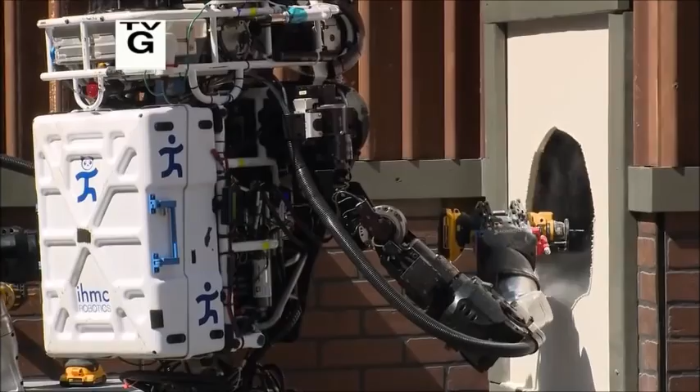It's one of the most ambitious challenges in the history of technology. Ladies and gentlemen, start your robots.

The race to build robots that can save lives in a disaster, that can even rescue us. But to do that, they'll need to climb ladders, walk over rubble, turn valves.

And no one knows if it's even possible. There's so many things that could go wrong. It's scary. When you try to instill human-like intelligence, human-like manipulation skills into machines, it's just very, very hard to do.

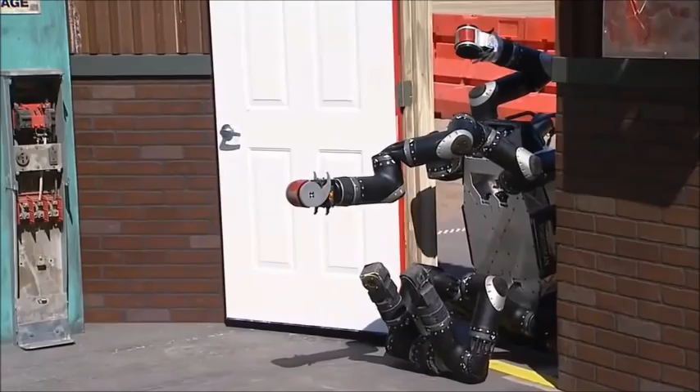What will it take for robots to have the right stuff? And are we ready for the consequences?

It's too easy to look at them and say, oh, they're not there yet. They will get to something very powerful. And then you have to say, well, where will we have gotten to? They might actually have the capacity to be smarter than us.

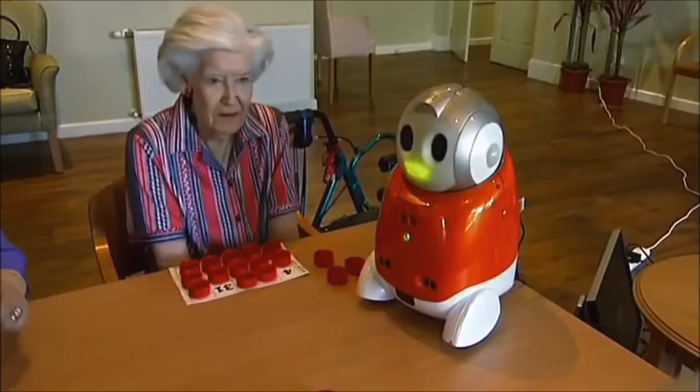What impact will robots have on our future? On how we work, how we interact, even how we see ourselves.

For decades, roboticists have wowed us with their creations. Do you have any questions?

Especially in Japan, where bots are starting to cook for us, do the laundry, even sing and dance.

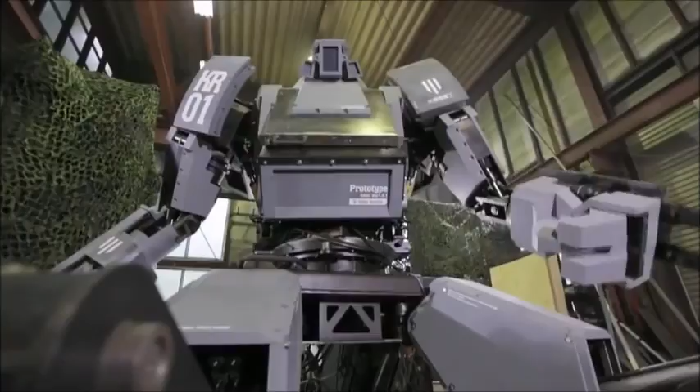Some look so human, it's hard to tell us apart. But looks can be deceiving. People see these humanoid robots developed in Japan and all these fancy things, and they had the expectation that, oh, we have these robots and they're gonna save the world. But that didn't happen.

March 2011. A devastating earthquake and tsunami rocked Japan. Explosions and fires at the Fukushima Daiichi nuclear power plant left the area dangerously radioactive. Going inside, even for a few minutes, was life-threatening.

It was the perfect time for Japan's cutting-edge robots to come to the rescue. But none did. The real tragedy was if simply some valves could have been turned, or some switches could have been flicked, or hoses attached, a lot of the meltdown could have been prevented.

The question was, when robots were needed the most, just how come they weren't effective? And so I think that led to a lot of reflection. After decades of research, where were our robot heroes?

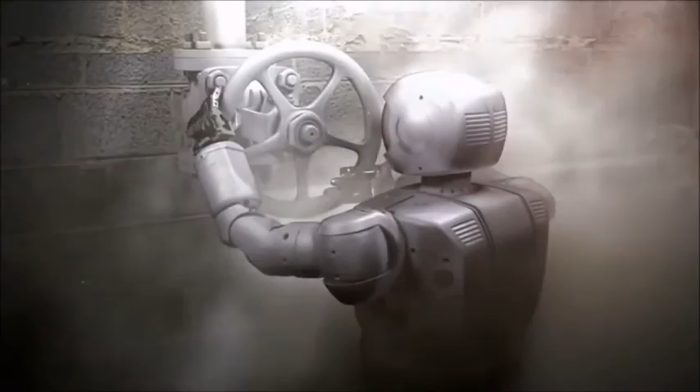For generations, science fiction has portrayed robots as our loyal servants. Welcome to Altair 4, gentlemen. I am to transport you to the residence.

But it turns out, our imagination has taken us much further than our technology. It's hard to create robots that can function in our world. One of the challenges with deploying robots in the real world is that the real world is like the Wild West. It's very rich and complex and very unforgiving.

What will it take for robots to make their way out of the lab and into the real world? We're about to find out.

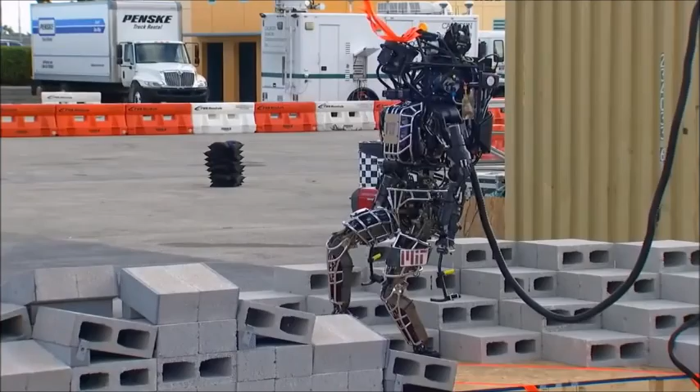Ladies and gentlemen, start your robots. At the most ambitious robotics competition in history. We welcome you to the DARPA Robotics Challenge. This is where imagination meets innovation. You have completed the course!

In 2013, at a racetrack on the outskirts of Miami, DARPA, the research arm of the U.S. Department of Defense, challenged 16 teams from around the world to build rescue robots that can help save lives in a disaster.

Very exciting, very exhausted, very nervous, and frustrated at the same time. Dealing with robots is always like that. It's the kind of challenge DARPA is known for. Cutting edge and high risk.

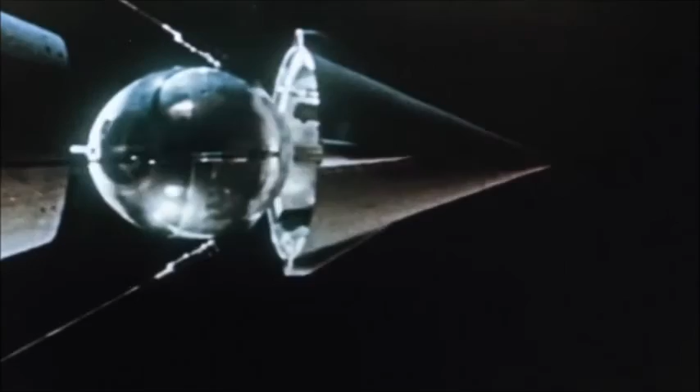DARPA was formed back in the 1950s in response to the launch of Sputnik, the world's first artificial satellite built by the Soviet Union.

Since then, the agency has spent billions developing military technology, advanced weaponry, like stealth technology, drones, and night vision. But the spin-offs from this research have gone far beyond the military. The internet, GPS, bionic arms, even Siri were all fueled with DARPA funding.

Cancel golf today. It's off your calendar. Good.

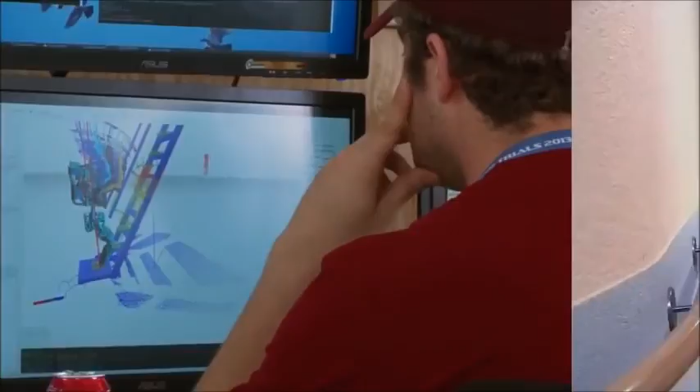If these researchers succeed in creating rescue robots, the same technology could be used to develop robots that take care of the elderly, babysit our kids, clean up after us. Robots in almost every facet of life.

But first, can robots really help out in a disaster? To find out, DARPA has set up an obstacle course for bots, with human operators controlling their every move.

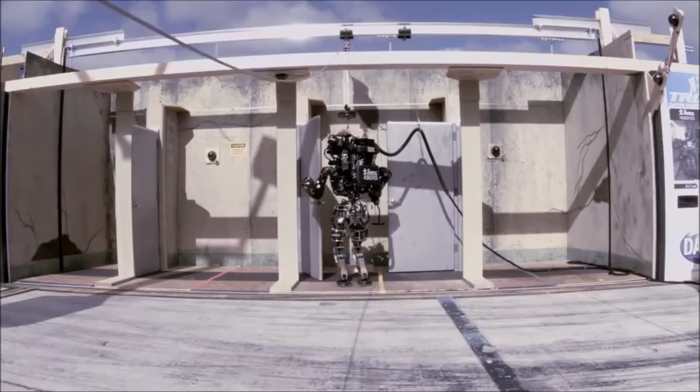Yeah, here we go. The robots must perform basic tasks like opening a door. All right, go, go, go. Turning a valve, drilling a hole in a wall, walking over rubble, even driving a car.

Bot after bot takes their first steps into the real world.

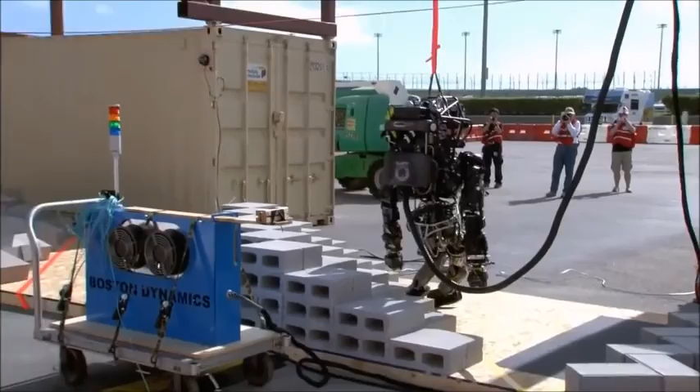And there's nothing easy about it. It's a monumental challenge. DARPA calls it DARPA hard. I almost said it was DARPA impossible.

Robots fall off ladders. Some barely move an inch. They even struggle to open doors. The things that a human can do instinctively, easily, you don't realize how hard something like walking is until you try to reproduce it in a machine.

When my baby daughter took her first step, did she walk? No, she took a step and she fell down, right? Over time, she started to walk. And it's kind of like we're seeing here. There are a lot of baby steps.

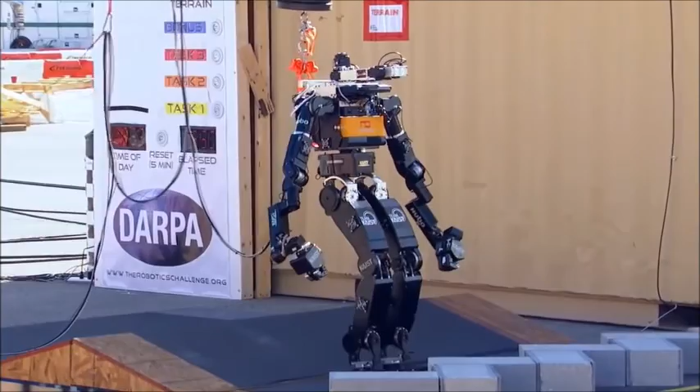After 2 days of competition, the results are not impressive. But this is just the start of DARPA's grand experiment. The agency is giving the roboticists another chance to get it right, and they're putting their money where their mouth is. The top scoring teams in this first challenge are receiving $1 million each to continue their work.

In 18 months, they'll return for the final challenge and the chance to win a grand prize of $2 million.

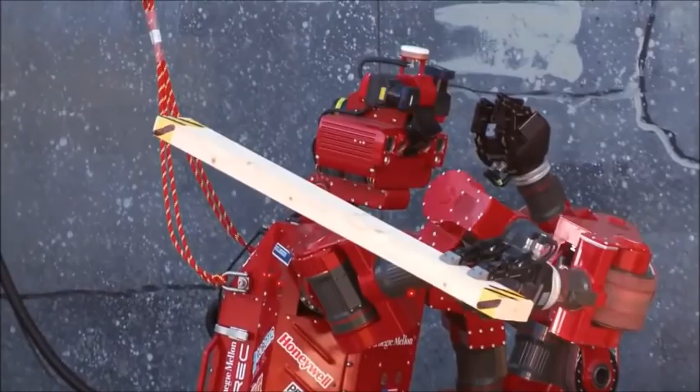It's not clear to me how well the teams are going to do. They can't be too hard because then everybody fails. Can't be too easy because then it's not worth doing at all. But if you make it just right, like Goldilocks, right? I have tried to hit the sweet spot of difficulty, but I think risking failure is the DARPA way.

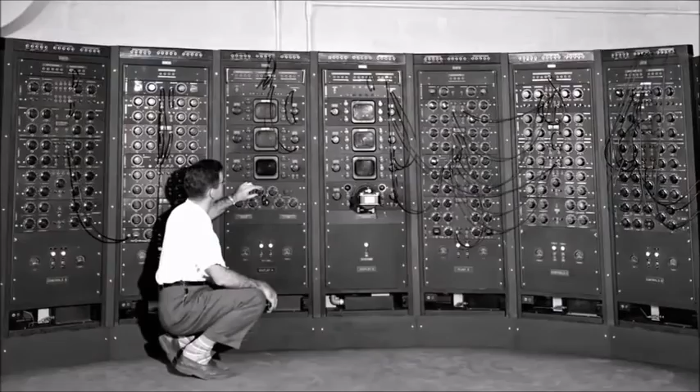Back in the early 50s, Alan Turing, one of the founders of artificial intelligence, said that the best thing we could do was build a robot with TV cameras for its eyes and motors to drive its legs and have it romp around the countryside and learn from the real world. But he decided that was technologically too hard back in the 50s, which it certainly was. So he said, let's leave that physical interaction to later, and let's work on more abstract problems, the intelligence abstract problems.

The field of artificial intelligence, or AI, has already built machines that beat us at chess, trade stocks with lightning speed, and search for anything we want in an instant. Yet, when it comes to robotics, progress has been painfully slow.

Some of the biggest problems robots face are things we humans usually take for granted, like mobility, manual dexterity, and the ability to see and understand our environment. These are the challenges the robotics teams will tackle in the DARPA competition, beginning with mobility.

What's the best way to make a machine that can move through our world? Does it need to walk on 2 feet like us? Some roboticists think the answer is yes.

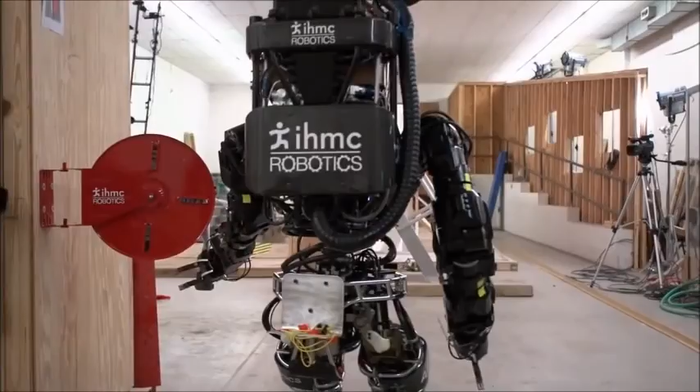In Pensacola, Florida, at the Institute for Human-Machine Cognition, or IHMC, one of the teams competing in the DARPA Robotics Challenge is hard at work developing its own software to run this massive bot named Atlas, a 330-pound powerhouse. DARPA funded the design and development of this rescue robot.

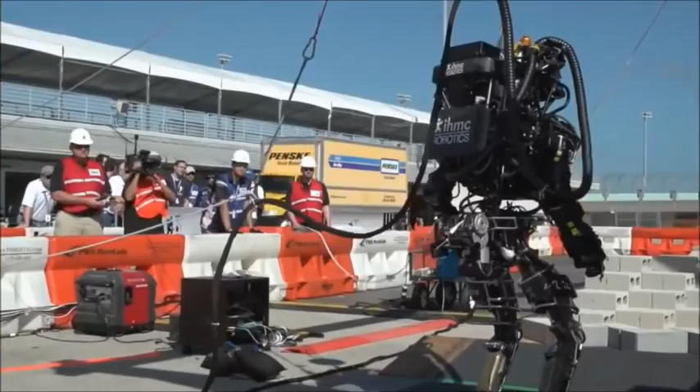Several teams competing in the challenge are using this hardware, but writing unique software to guide their robot.

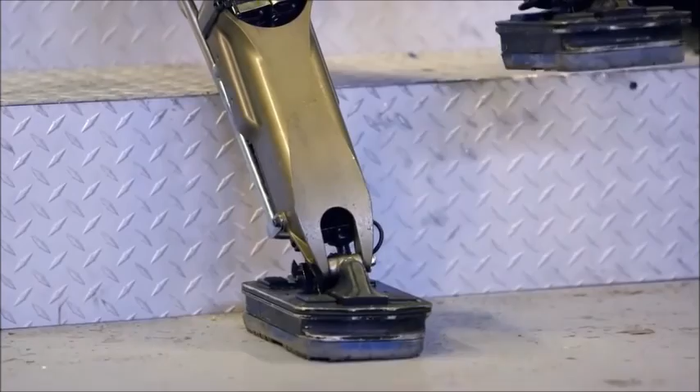You might wonder why Atlas is so top-heavy. Most of its oversized head is packed with cameras and sensors, and while its feet may look small, they're designed to fit in the kind of places we walk.

With bipedal walking robots, there's still a lot of strategies we have to determine, and there's no known textbook solution yet. It's more art than science still.

For team leader Jerry Pratt, finding the best way for a bipedal robot to walk has not been easy or quick. Well, I've been working on bipedal walking robots since 1994, so 21 years now. He started back in graduate school at the MIT Leg Lab, where some of the most bizarre-looking bots hopped, jumped, and flipped. But the robots Jerry built were different, because they walked on 2 feet.

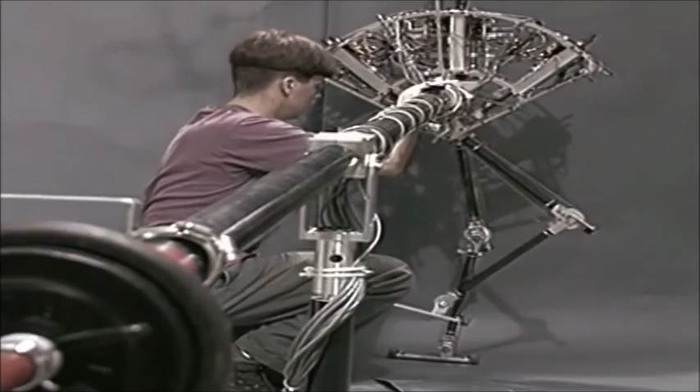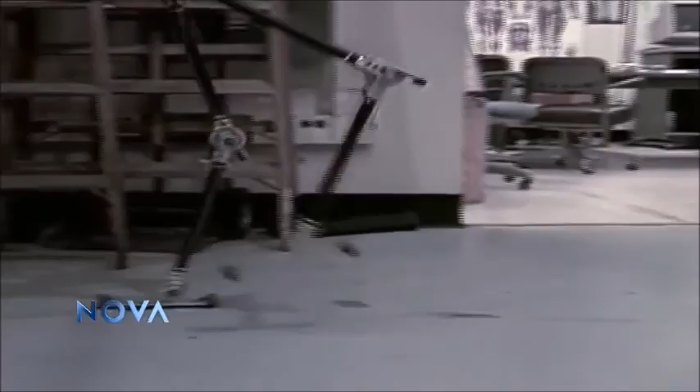Using nature as his guide, Jerry gave his bipeds hips, knees, and ankles that mimicked how animals move. This one, called Spring Flamingo, had specially designed motors that worked a lot like muscles, varying the amount of power each joint used. Its legs and feet worked a bit like shock absorbers. They had a little give.

That robot was a really good workhorse. We had it working for about 3 years, probably walked about 20 miles or so.

When it came to designing a humanoid, he focused on developing the perfect combination of hardware and software that would enable his biped to stay upright as it calculates the best way to shift its center of mass, lift its leg, swing it forward, and put its foot back down in the right place, and with just the right amount of pressure. To make these elaborate calculations, the robot needs instructions, lines of code that tell it how to move.

These lines of code are written in a programming language that resembles English. But for Atlas to use them, its onboard computer has a program that translates them into a language a machine can understand: zeros and ones. It takes more than 2 million lines of code to run Atlas, 500,000 just to put one foot in front of the other.

It's the interplay of hardware and software that keeps this bot on its feet, an ability that took hundreds of thousands of years of human evolution to perfect. We'll often look at what strategies does a human use in order to walk, because the physics in the world that a human operates in is the same as the robot.

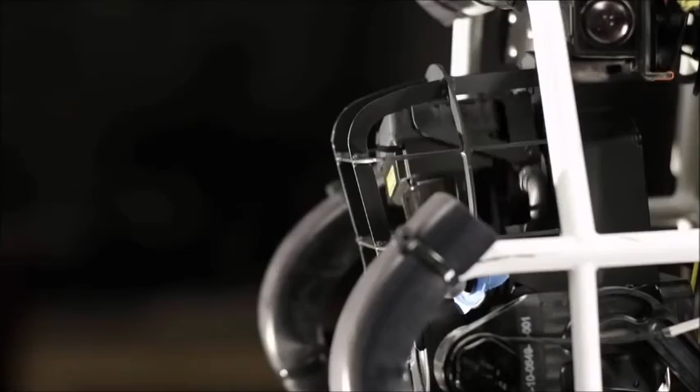What kind of senses does Atlas use to walk on 2 feet? For eyes, the bot has a stereo camera and a couple of fisheye lenses sticking out the side of its head, along with a spinning laser called LiDAR that scans everything in the world around it and creates a 3D model of its environment. Atlas doesn't have an inner ear to tell it which way is up.

Instead, it uses a small cylinder in its butt that contains gyros and accelerometers that tell it where it is and how it's moving. In addition, sensors on each joint tell Atlas where its limbs are in relation to each other. The result is an extraordinary sense of balance, allowing Atlas to stand on 1 foot like a ballerina, at least in the lab. But in the real world...

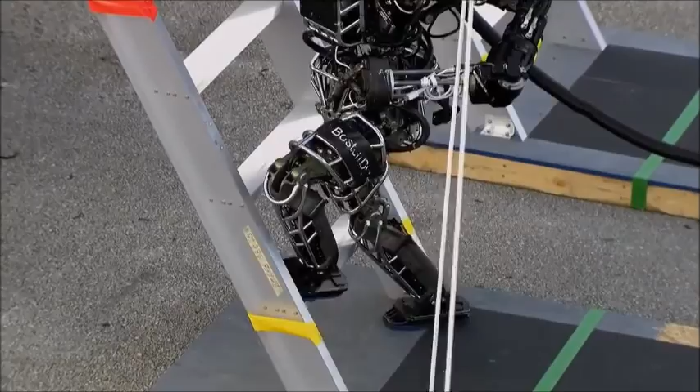Atlas's gyros and sensors aren't always enough. We only have a limited number of sensors on the robot. Whereas with a human or an animal, you have thousands of little force sensors on every square inch of your body, over 100,000 just on the soles of your feet. You can step on something and detect what it is, whereas the robots, they don't know that. They just know they stepped on something.

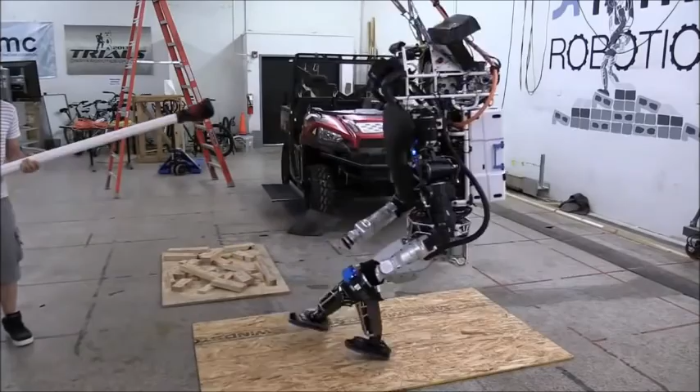At the final challenge, if Atlas should step on something the wrong way, if the hardware and software don't work perfectly, it will fall. We cannot get up from a fall currently, and we probably won't survive a fall. If we fall during the finals, that may be the end of our whole weekend.

Atlas isn't the only biped that has trouble staying upright. Meet Hubo, designed and programmed by cousins Paul Oh and Jun Ho Oh. At the first challenge, Hubo clearly wasn't ready for the big, bad world. It's with fondness, it's also with some pain that we think about it. We went into the challenge with quite a lot of enthusiasm, but when we got there, really, it was just like one thing after another.

There were a lot of these real-world instances that we did not experience in the lab. That was a real awakening.

Across the ocean, at the Korea Advanced Institute of Science and Technology, Jun Ho Oh is also doing some soul-searching. Our expectation was very high, but result was very catastrophic. So the gap was too big. It took at least a couple of months for the recovery, then I get back to my normal mental stage.

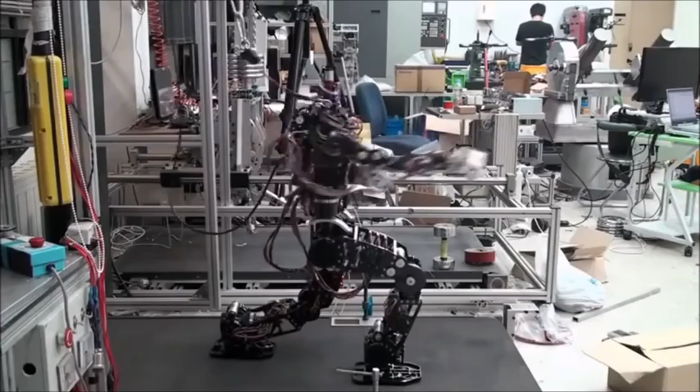After the shock wore off, the Koreans agreed to make a radical change in the design of their biped. My cousin came up with the idea of adding wheels to Hubo's knees, as well as casters on its toes. I call it the kneeling prayer mode. Others like to call it wheeled mode or transformer bot mode.

Okay, so we are so happy. So we decided: short distance movement, just walk, okay? And far distance, we move on wheels. It's much more stable.

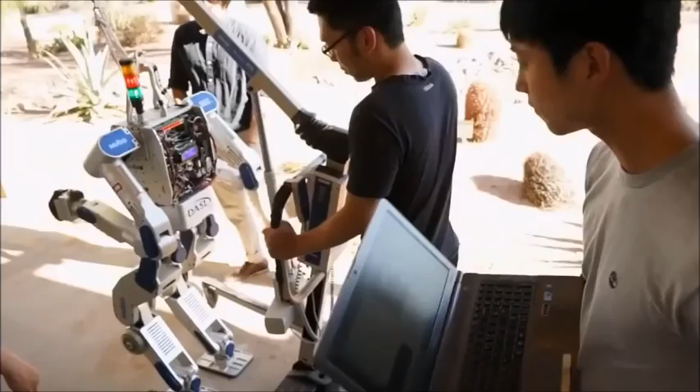Humans don't have wheels on the knees, but there's no reason why we can't add that to a robot. When the Koreans return for the final challenge, they'll debut their humanoid transformed with the help of some clever engineering.

But for a robot to help out in a disaster, getting there is just the first of many challenges. To assist rescue workers in the real world, it needs hands, with the kind of strength and dexterity it takes to lift heavy hoses, drill into walls, solder, and saw.

It needs a pair of these. Our experience of the human hand is that we can do everything with it. We can dig ourselves through rubble, we can make really nice paintings, we can knit. The human hand really distinguishes our species from all other species.

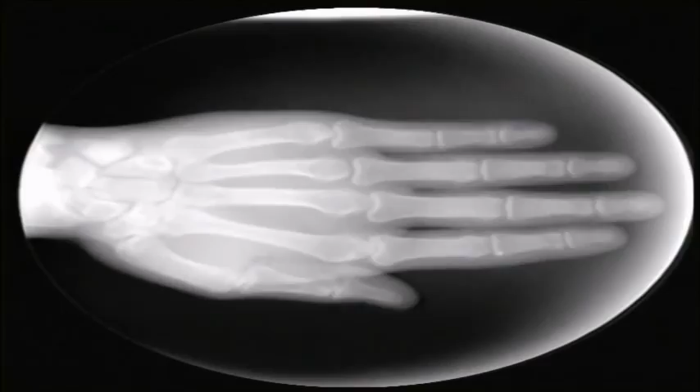If you look at the way humans manipulate objects, we have this instinct for tactile sensing, for feeling the world. Understandably so, we've had over 200,000 years of human evolution to get to this particular point. Is it possible to translate a masterpiece of evolution into motors, cables, sensors, and thousands of lines of code?

On the outskirts of London, behind an unassuming storefront, a small group of robot enthusiasts are building a robotic hand that they hope could one day rival our own. When we first started building a hand, we actually bought anatomy books and tried to understand how the hand works. We thought it'd be good if we could copy, as best we can, the human hand. The shadow hand was built with the idea of trying to get as close as possible to the human hand, but as engineers. Like the human hand, this robotic version has 4 fingers and a thumb.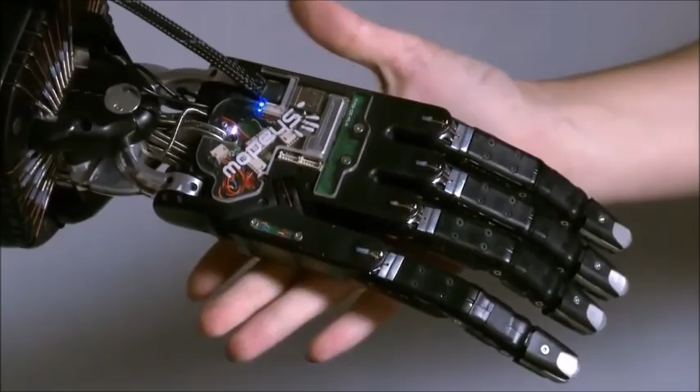It's about the same size as the original, and can even shake like one. But that's where the similarities end. We pack a huge amount of sensing and actuation.

We have 25 joint position sensors, 9 analog to digital converters. We have 2 tendons coming from each joint to a motor in the forearm, 20 motors in the forearm. Each motor has a temperature sensor, a current sensor, and 2 force sensors, so we can tell how hard the motor is working and how hard it's driving the tendons. We put contact sensing in the fingertips so we can tell that we've touched something. So there's a wealth of computing power just to get something that has the same set of movements as your hand.

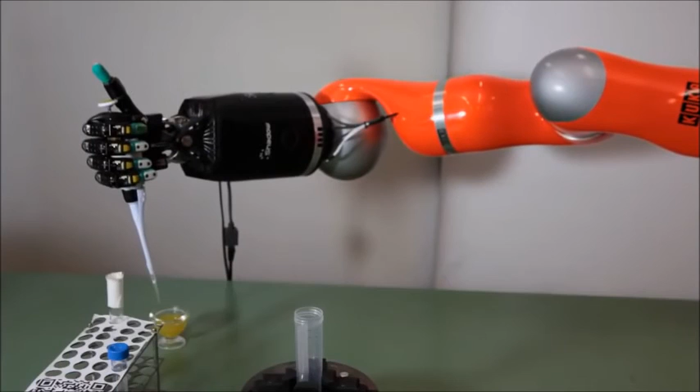And with this level of dexterity, it can do a lot more than card tricks. We had this hand handling pipettes and lab equipment, removing the human from the risk. For example, people that work with very, very nasty bacteria and viruses.

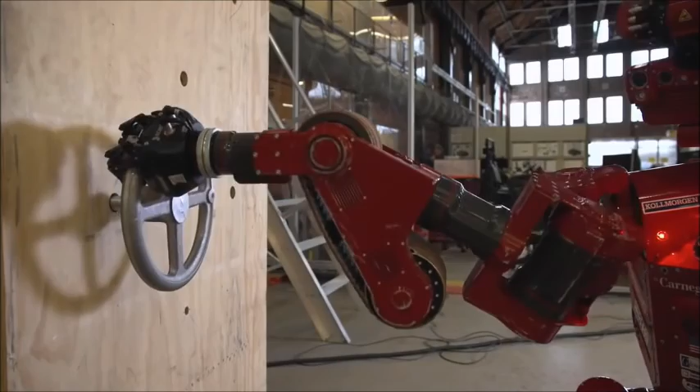The shadow hand was designed for delicate tasks, not for dirty jobs like this. When you look at where robot hands get used, you find people who want to do something delicate and precise, and people who want something big and rugged and solid. For the robots in the DARPA challenge, strength and precision are a must.

Finding the balance between them has been a struggle for team leader Brett Kennedy, who developed this 4-legged rescue robot named RoboSimian here at NASA's Jet Propulsion Laboratory.

My first intuition is that this needed to be a very robust hand, and I'm thinking, well, robust means big. Why don't you go find out how big Wilt Chamberlain's hand is and make a hand that big? So, if anybody's curious, Wilt Chamberlain's hand is very, very big.

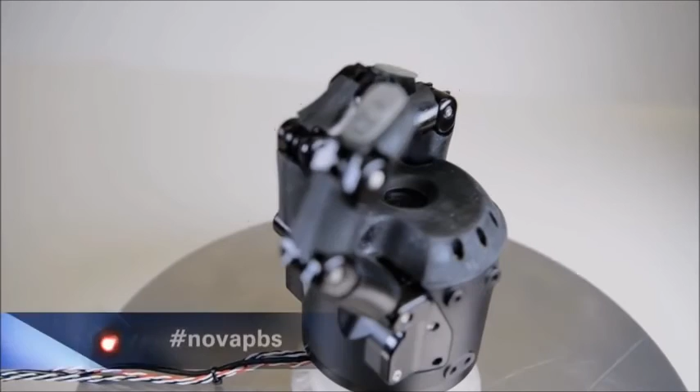And not only is it very, very big, when you make a robotic version of it, it actually cannot deal with normal human scale tools. So they modify their design, making a smaller hand with just 3 fingers. This does everything we needed it to in the competition. It grabbed everything, the human tools, so we thought we were in pretty good shape.

But then, at the first challenge, RoboSimian had to open a door, and things got messy. So here's an individual finger, and in that individual finger there is an artificial tendon, a synthetic fiber. When excessive forces happen, it snaps.

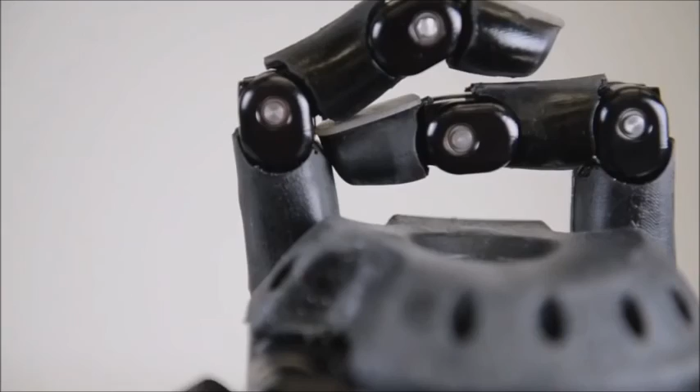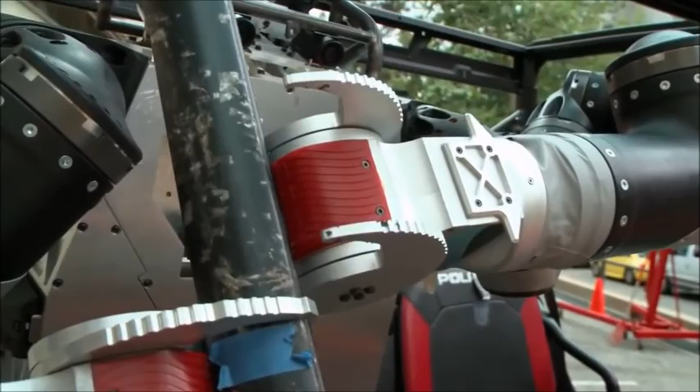When Kennedy realized RoboSimian's fingers couldn't provide the strength he was looking for, he came up with a radically different idea. So this is the cam hand. To do most of the work that we need to, a simple hook works just fine so that we can actually get a grasp and we can hold on to most everything we have to. Fact of the matter is this is a very simple, dumb system. It closes until it encounters something, and then that will hold it and hold it securely.

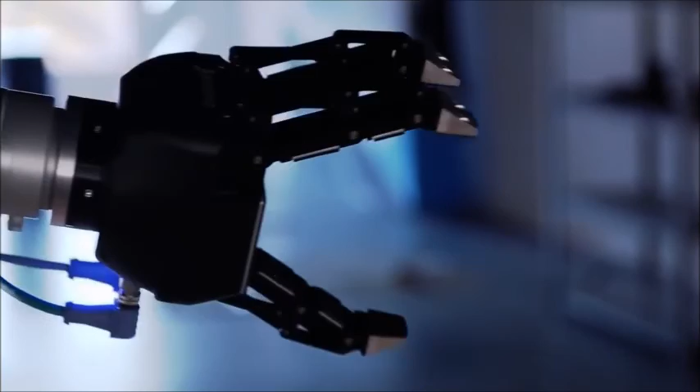In their quest to grasp victory, the teams competing in the DARPA Challenge will rely on all kinds of hands. Many are using this gripper, designed with 3 fingers that can wrap around a variety of objects and even pick up something small. If we look at tasks like opening a door or using a drill and other hand tools, pretty much all these tasks you can perform using 3 fingers.

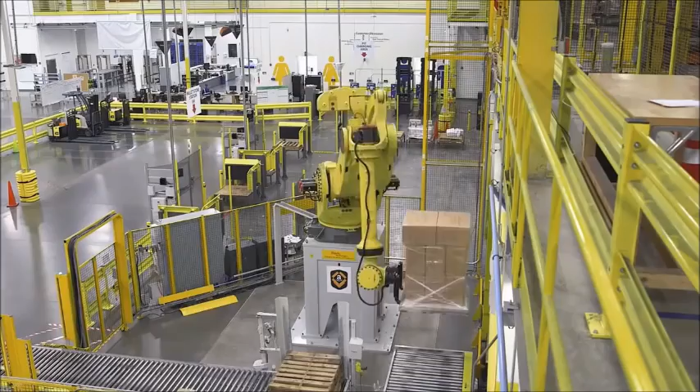Robotic grippers have already made their way onto the factory floor, attached to massive robotic arms that are as robust as they are precise. They build cars, lift heavy boxes, pack beer, sort through anything and everything from batteries to pancakes, doing the kind of jobs many people consider repetitive and downright boring.

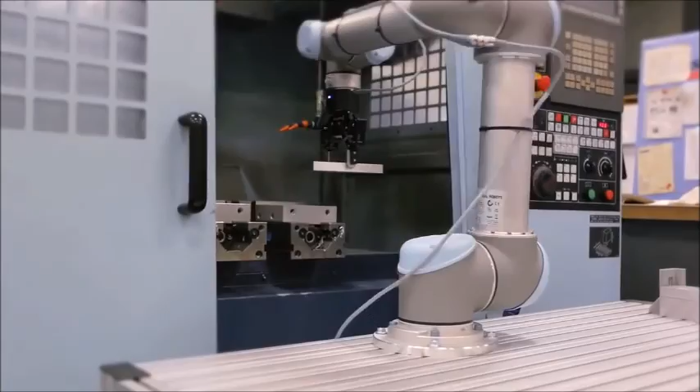But some experts fear as robots move beyond the factory into the real world, they'll take on a lot more. I think that we will lose at least 20 or 30% of our jobs over the next 20 years, and probably more.

Fast food workers are mostly going to be replaced. And the cashiers at Walmart, their jobs aren't going to last that much longer. The first to go are going to be drivers. Uber is spending a lot of money on driverless cars. Google is spending a lot of money. Now Toyota is. 40 years from now, there are not going to be a lot of jobs.

But not everyone agrees the future looks quite so grim. Over the past century, while robots and automation took over many manufacturing jobs, other kinds of jobs have increased. Some think that trend will continue. Machines in all of modern economic history have helped create jobs, not taken them away.

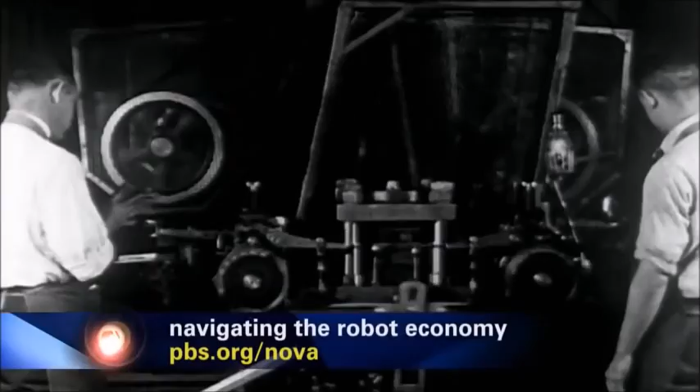Machines are complements to workers, not substitutes. They come together and enhance the productivity of each. They need each other.

Today, more and more jobs require humans to work side by side with robots, on the assembly line, programming them, and repairing them. Technology creates new jobs.

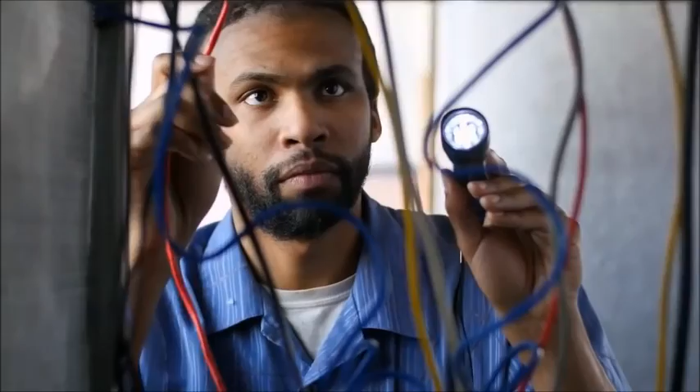But only for those who have the skills to adapt. What happens to the workers left behind? The worker who was displaced has to be compensated through retraining or through a pension. So that's a social problem, not a problem rooted in technology.

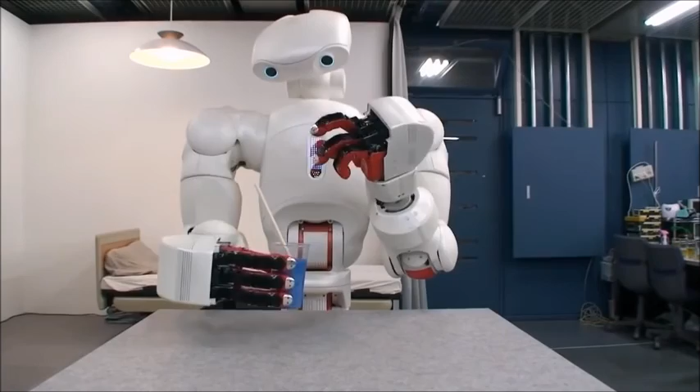People should already be thinking about what kind of society we would want if not everybody can have jobs. Many ethicists say we should also be thinking about which jobs we want to hand over to machines. Much of the things that we are creating can be used for a whole broad range of potential applications, ranging from elder care and child care robots to healthcare robotic platforms, even surrogate sex objects.

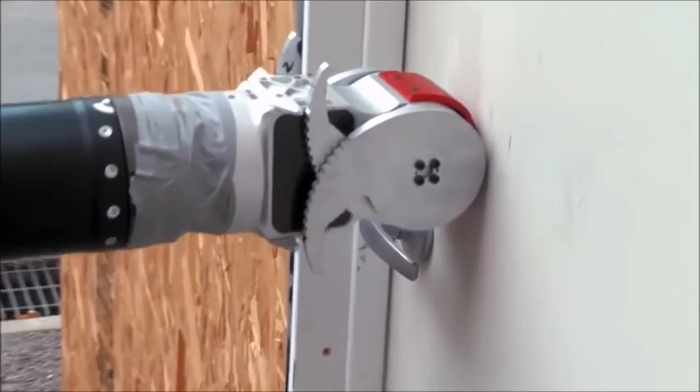What is acceptable? What impact these high-tech machines will have in the workplace and our homes remains unclear. But one thing's for sure: robots are starting to take their first baby steps out of the lab and into the real world, learning how to manipulate objects we use every day.

But for a rescue robot to be truly useful, there's another hurdle researchers face, the toughest one of all: the challenge of giving a machine the ability to understand its environment, to give it a brain.

Our robot doesn't really have what you'd call a brain. He's not seeing the world, he's not perceiving the world. It's not thinking, it's not reasoning. You know, it's pretty dumb.

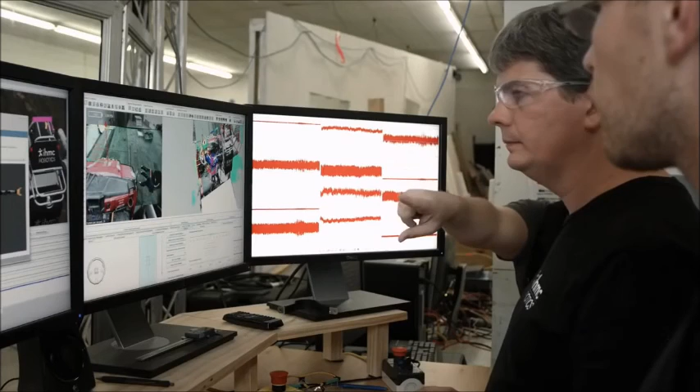In fact, today's rescue robots are so dumb, DARPA permits human operators to guide them step by step. The bot waits for instructions that tell it what to do, those zeros and ones that computers understand.

The instructions travel through an elaborate pipeline that connects every piece of hardware, every motor and sensor, to a computer controlled by a team of human operators. The operators communicate with their robots via a wireless connection, just like they would at a real disaster and at the final challenge.

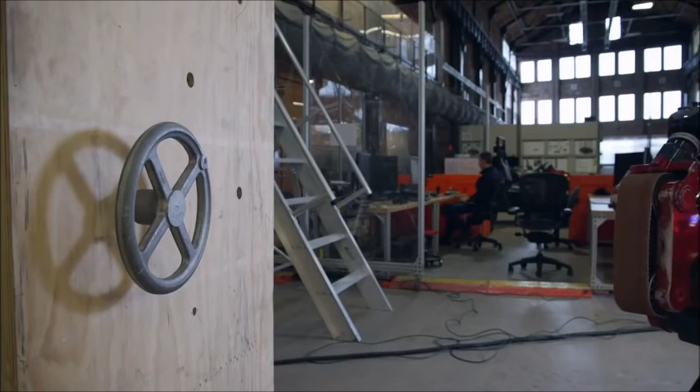These operators at Carnegie Mellon University are about to guide their rescue robot named Chimp through one of the skills it needs to master for the final DARPA challenge: turning a valve.

Using 6 different cameras located on the front and back of its head, and a spinning sensor called LiDAR, the bot sends data about its environment to the operators. A 3D image of Chimp's world appears on their monitors.

Chimp has no idea what it's looking at, so with the click of a mouse, the humans tell it exactly where the valve is. Things like recognizing objects, that's a very hard problem in robotics. So we let the human tell the difference between a cat and a dog, a valve and a door.

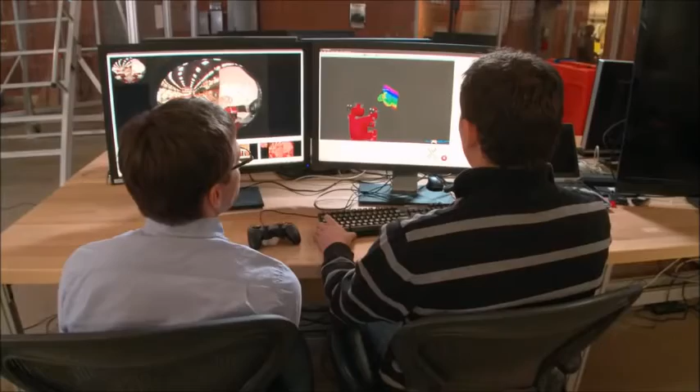Turn the valve. Next, they show Chimp where to grab the valve, which way and how far to turn it. But it would be impossibly slow and impractical for the operators to tell Chimp how to move every joint, every sensor, every motor of its complex arm.

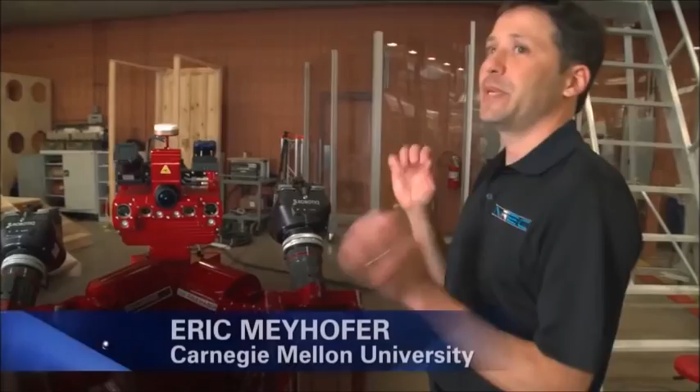As we move towards developing this technology further, we really want to push on the robot autonomy and let Chimp do more things on its own. But we always want to keep this as a tool for a human. In other words, keep the human in the loop and in control.

But that's not every team's goal. At the Massachusetts Institute of Technology, Russ Tedrake is taking a different approach. He's determined to give his Atlas robot as much autonomy as he can, to make it a whole lot smarter. Our goal as researchers, especially in this artificial intelligence lab, is to solve the long-term research questions about how to make autonomous robots. This is the closest we've ever come to building an artificial intelligence machine where this humanoid robot is moving through the world solving real problems.

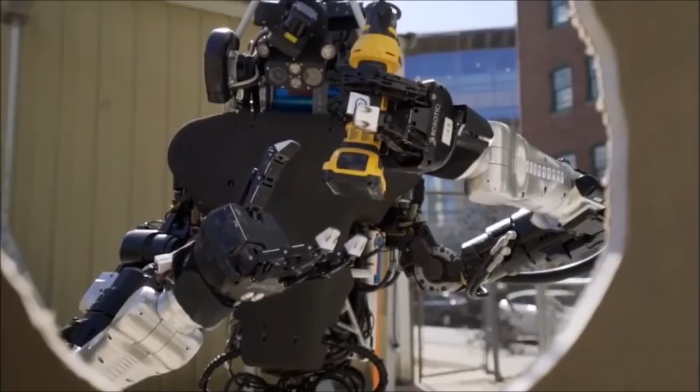At a disaster where you can't always count on a wireless connection, the smarter the bot gets, the more it can do on its own. To create a more autonomous robot, Tedrake is developing software that helps it find and identify objects with a bit more independence.

So if the robot is just looking at my kitchen at home, there's dishes everywhere, and you ask the robot to find a spoon, that's a really hard question. If the human just says, there's a spoon roughly over here, click, and he just has to look in a little patch of space for something that's roughly the same shape as a spoon. That takes an extremely hard problem of object recognition in a complicated environment and turns it into a very simple problem of, okay, I want to look for spoon-shaped things in this small region of space.

While Chimp needs its human operators to tell it exactly where a valve is and where to grab it, MIT's Atlas is programmed to recognize a valve on its own, figure out the steps it needs to take as it approaches, then grab and turn it with very little human help. We can put it in an autonomous mode and basically just watch the robot execute.

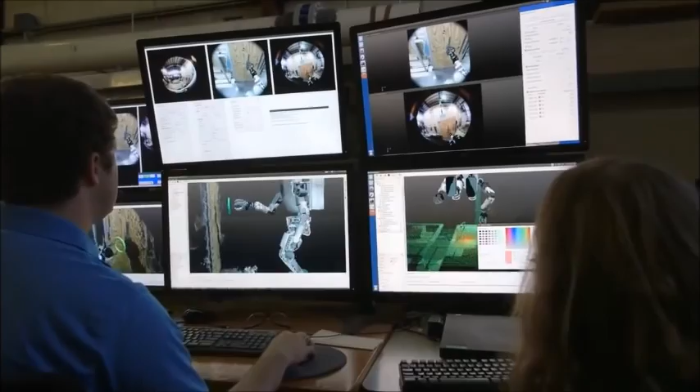It shows us what it's about to do. We could always stop it if it looked like it was going to do something wrong. But when things are going well, the robot's operating almost completely autonomously. So there's no real input coming from us to the robot at this point. It's just going on with its task.

A more self-sufficient robot could potentially help save more lives in a disaster. But just how independent do we want rescue robots to get? What if an autonomous robot enters a disaster and has to decide who lives and who dies?

You are in danger. Save the girl! I was the logical choice. Calculated that I had a 45% chance of survival. Sarah only had an 11% chance. 11% is more than enough. A human being would have known that.

While today's cutting-edge machines, like the thousands of drones used by the US military, still have a human in the loop, what happens in the future if they don't? There's conversations going on right now, conversations about what are the ethical laws of robots? How far should we really push this technology? How much autonomy do we want to give this new technology?

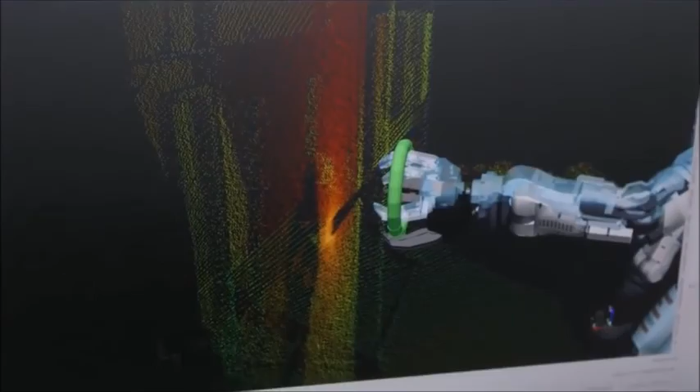There's so many things that could go wrong. The chance that the robot could break, or something that worked 99 out of 100 times, but we get unlucky. It's scary.

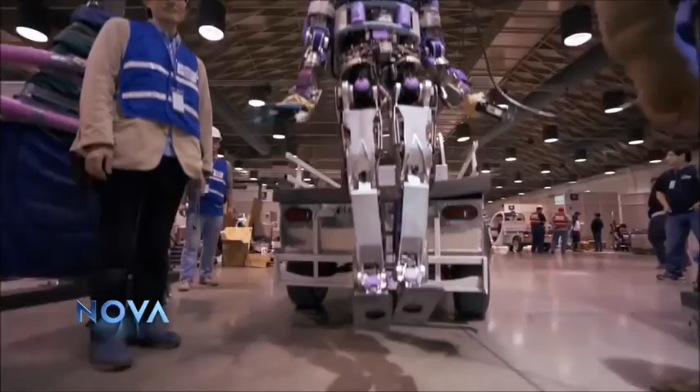June 5th, 2015. Our roboticists meet once again, this time at the Los Angeles County Fairgrounds. Over the next 2 days, they'll face off with finalists from around the world. Several teams come from Korea and Japan. This little robot comes from Germany. Most are funded through government or corporate sponsorship, but some bots, like this odd-looking one called Cogburn, are funded by the teams themselves.

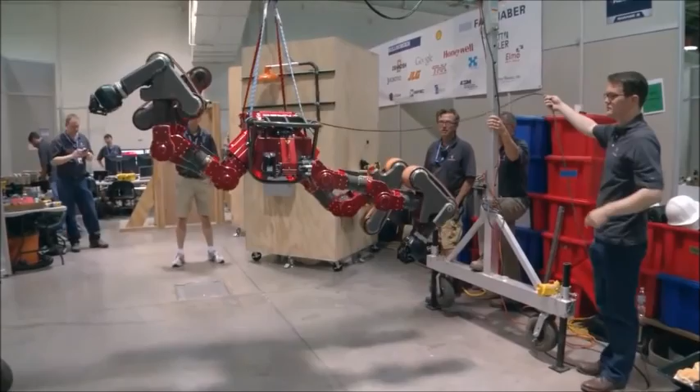We want to be first place in this competition. You too? Yeah, I do, of course. It's a very stiff competition. Looks like there are a lot of good teams. Probably a lot will make it all the way through the course, so it'll come down to top speed.

To win, each robot must perform a series of tasks, a lot like the ones they faced in the first challenge: from driving a car, to drilling a hole in a wall, to walking over debris, to tackling a flight of stairs. The robot that completes the course in the shortest time wins.

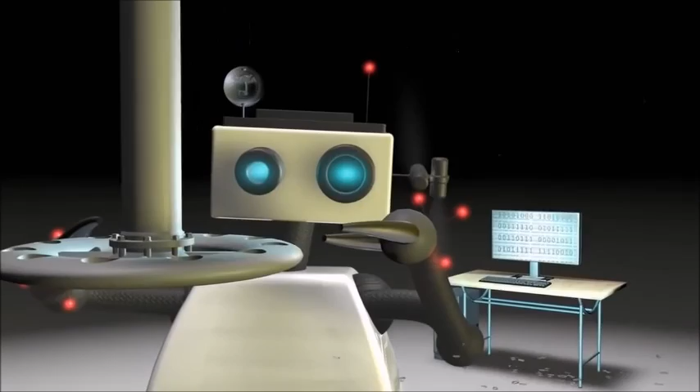That puts a lot of pressure on the operators to keep their bots moving. And DARPA has thrown another wrench into the mix: just like at a real disaster, the power of the wireless connection between the operators and their robots fluctuates. Sometimes the robots will receive a degraded signal, just bits and pieces of the data that tells them what to do. Other times, no data, no instructions at all.

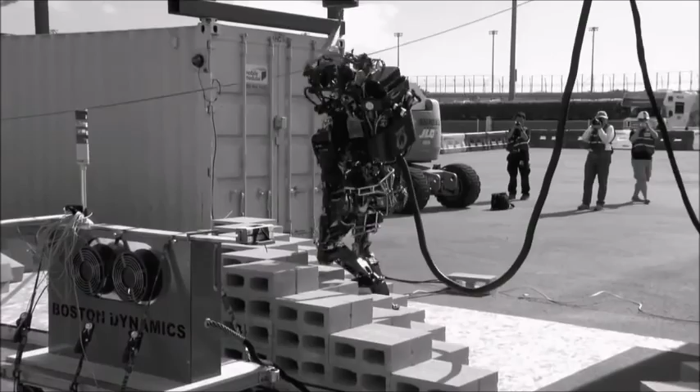DARPA is hoping this will push the roboticists to develop more autonomous systems, bots that can finish a job without our help. But what makes the final challenge downright nerve-wracking is that, unlike the first competition where the bots were tethered, this time around there are no safety lines allowed, putting these multi-million-dollar machines in real jeopardy.

What I was worried about is that almost none of the teams had tested their robots off the safety tether. We had no idea when these robots fell how badly they would break, so many of the teams were really scared.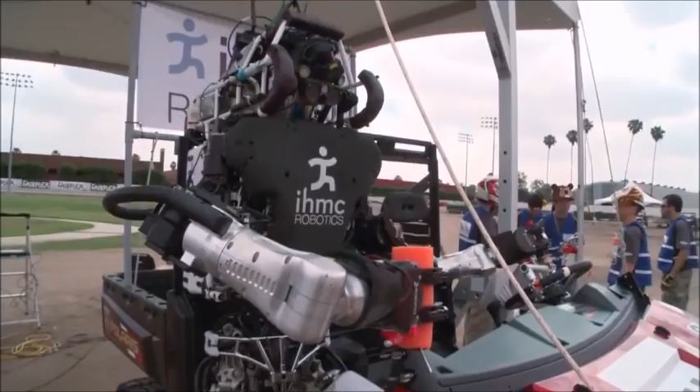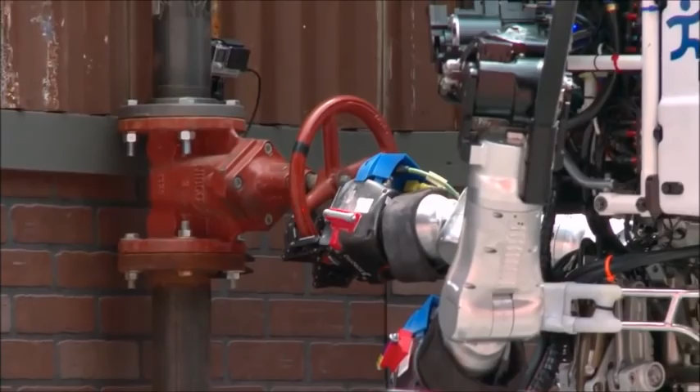Finally, the competition begins. Each robot has 2 chances to run the course. IHMC starts their first run. The robot drives without a hitch, walks up to the door with ease. All right, going through the door. All is looking good. Just 2 more tasks to go. Nice.

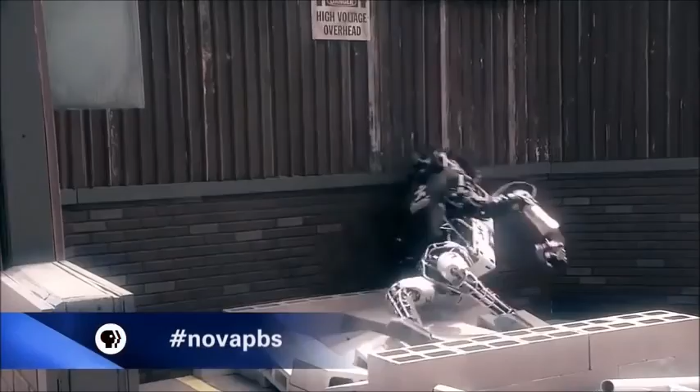It's Jerry's worst nightmare. After years of perfecting his walking software, a tiny misstep in the real world brought one of the most advanced robots on Earth to its knees. Nobody was really sure if the Atlas robot would survive a fall. We've never had Atlas fall before today.

The team worries the bot can't be repaired in time for its final run.

For Carnegie Mellon's robot, Chimp, the day is also filled with ups and downs. When he fell down through the door, he's laying there, and we're just, oh no.

Back in the garage, the operators scramble to find a way to get the red bot back up on its treads again. But the bigger a bot, the harder it falls.

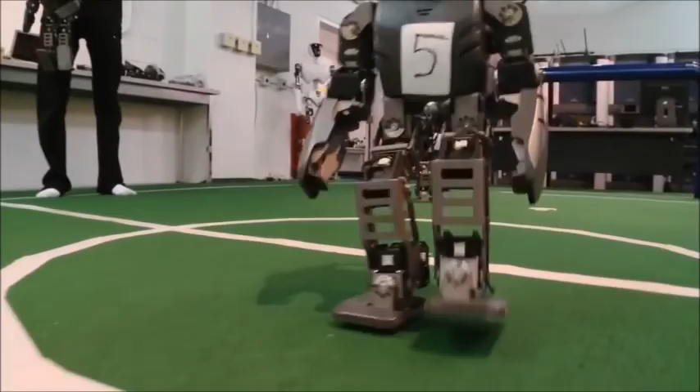Smaller robots fall without breaking and have truly bizarre ways of getting back up again, but they're too small to do the kind of heavy lifting rescue robots need to do at a disaster. Once you make it heavier and larger, you need stronger motors, and stronger motors mean heavier motors, and heavier motors increase the overall weight.

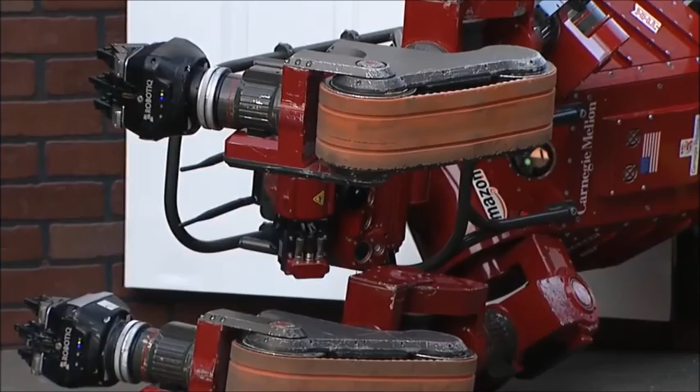Chimp weighs over 400 pounds. That's an awful lot of robot to lift. The crowd begins to wonder if its run is done.

I found it fascinating to watch the crowd watching the robots. This was really an emotional moment. You know, they're collections of wires and gears and motors, and we were sympathizing with them at a very basic level.

Then Chimp's leg begins to move. And this little kid down in the front screams, 'He's getting up!' The bot not only gets up, it completes all 8 tasks, becoming the first robot to finish the course.

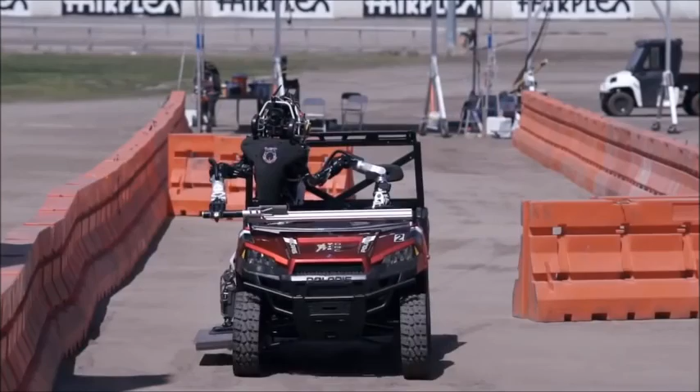But not every team is so lucky. As MIT starts its run, hoping to show off its robot's autonomy, things run amok in the control room. We made a simple operator error when we went to get out of the car. We forgot to turn off the driving controller, so the foot tried to push the throttle when it was getting out of the car.

In an effort to drive and get out of the car at the same time, the robot keels over and breaks its right arm. But the operators were able to recover and do basically the entire course left-handed.

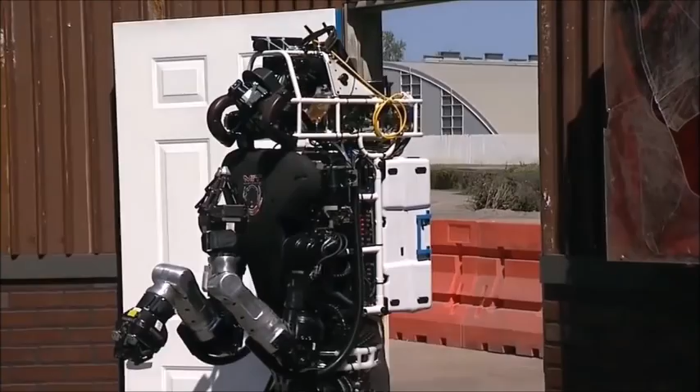The robot is still able to do most of the tasks, but it faces one insurmountable problem. The team has programmed it to use two hands to pick up the drill and turn it on. It can't do that when one of its hands is broken. Without completing all the tasks, Team MIT has no chance of winning.

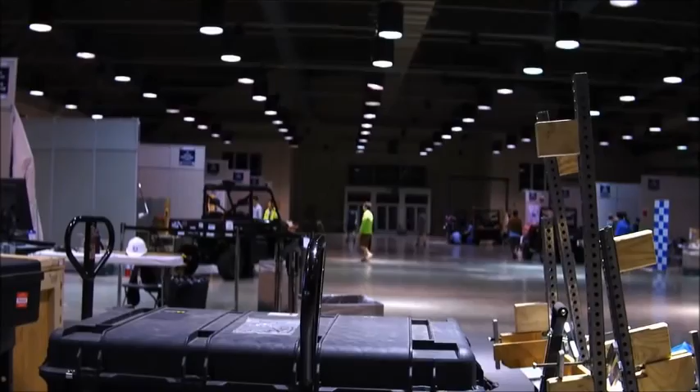A weary Team IHMC has worked through the night trying to fix its robot. Somehow the robot's still working, but the fall we took did something to the robot where he's kind of all messed up a little bit. There's something wrong with its LiDAR, the system that scans the robot's environment.

The operator's going to have to adjust on the fly and compensate in his head for the errors in our sensors. Are we really leaning that much? Our strategy is still what it was yesterday, 8 points or bust.

The time has come for their final run. They make it through all the tasks and approach the dreaded debris, where they fell on their first run. All right, you got to swing the right first. That's what I'm doing.

But this time they succeed. The operator guides their robot all the way up the stairs, finishing the course in record time.

Having the human in the loop, you've got a supercomputer up here. Humans can adapt to just about anything. 8 points confirmed. The team is now in the running for first place.

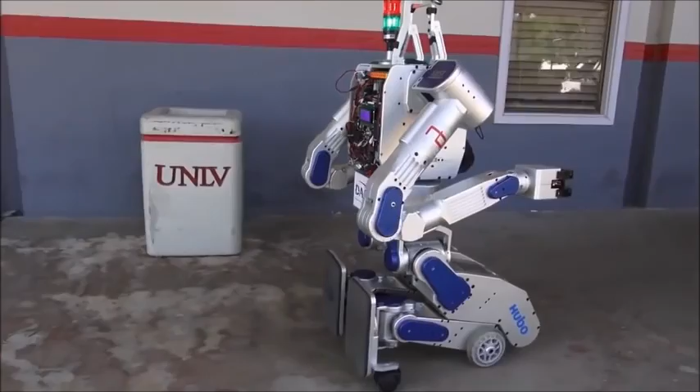But a one-of-a-kind bot could still give them a serious run for their money. Cousins Paul and Jun-Ho are each competing with their own robot, doubling the chances that one of their humanoids on wheels will win the day.

Paul's team makes it as far as the drilling task, until the drill gets stuck, overheats, and shuts down. But cousin Jun-Ho's team moves on. Their robot completes all the manual tasks by rolling on its knees or standing on its feet.

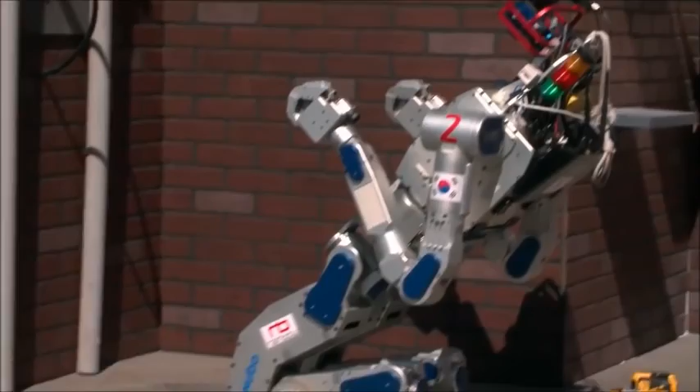But when it approaches its final task, the stairs, it suddenly stops. Back in the garage, its human handlers are double and triple checking the instructions they're about to send their robot. A mistake here will cost them the competition.

You have to understand that when the robot is staying still, the operating room is very, very busy. If the robot is moving, they don't do anything. Their job is done. All they can do now is watch and wait.

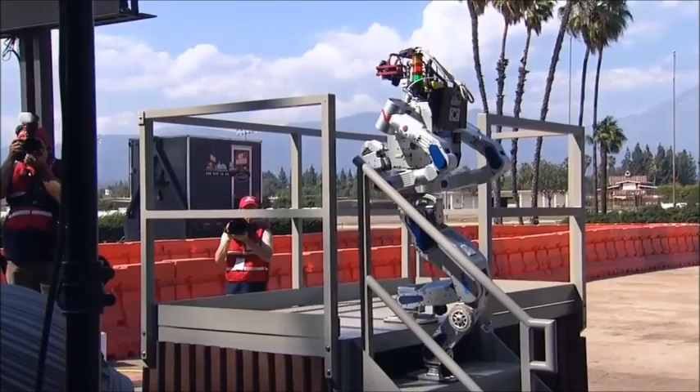Finally, Hubo starts to climb the stairs, unlike any human on Earth, with its head facing forward and its feet facing back. The humanoid on wheels finishes all 8 tasks faster than any other robot. Jun-Ho Oh's robot Hubo wins the day.

IHMC comes in second. Team Chimp from Carnegie Mellon comes in third.

These bots may have moved slowly, but just like a toddler, they're taking baby steps into our world. We tend to think the world today is what it's going to be like in 10 years and 20 years. But if we look back 10 years, look back 20 years at what we had, the world has been totally transformed. It's really hard for us to imagine how different it's going to be.

In some ways, the change in the field has been very incremental, but in other ways, it's been completely unpredictable. It's too easy to look at them and say, oh, they're not there yet. Well, they will get to something very powerful. And then you have to say, well, where will we have gotten to?

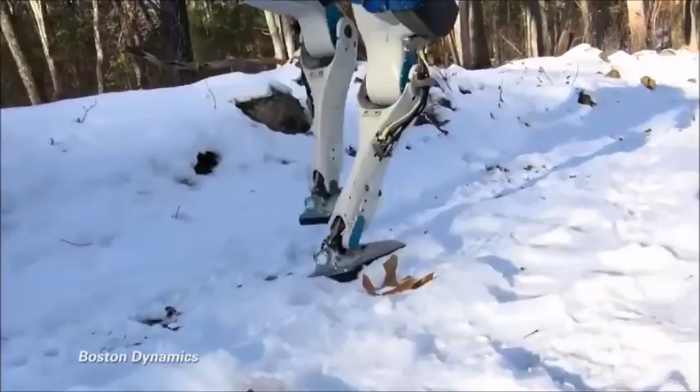In fact, a few months after the finals, Boston Dynamics, the makers of the Atlas robot, took this updated version for a stroll in a snow-covered woods. While it stumbles, it quickly recovers its balance, just as we would.

I think we just need to approach this with our eyes open and understand our vulnerability to a technology that we are on the cusp of creating.

There's no question that developing rescue robots with the potential to save lives makes a lot of sense. But the potential for other applications remains unclear. The time is now to think about their role in our lives as we face the rise of the robots.